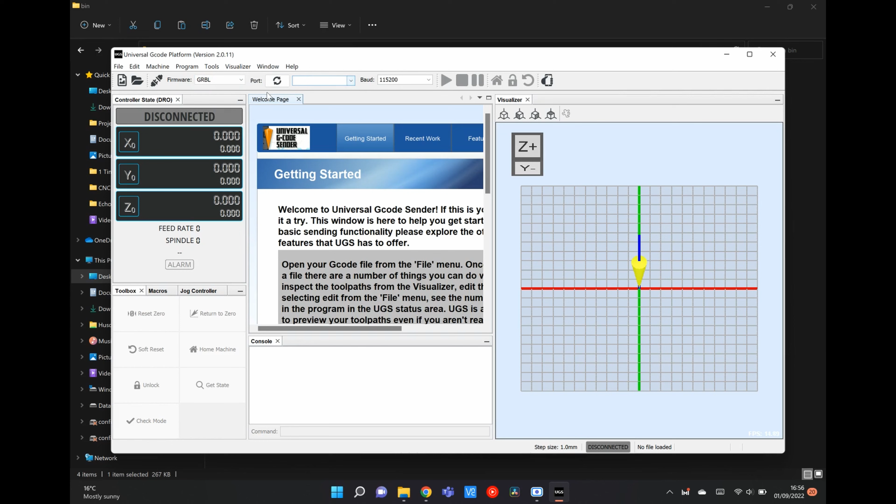So I've installed that in my same CNC folder, and I've got the Universal G-Code Sender software loading there now. So here's the software, so it looks like where you can obviously connect to your machine. A bit of a get-started guide there, and where you can obviously load the different files. So you've got the open section to find the file that you want that's got your G-code on.

I'm going to try and connect to my device now. Okay, so what I'm trying to do at the moment, I've still got it plugged into the USB port of my laptop now, but it's not connecting. So I've got the driver installed, it's not connecting.

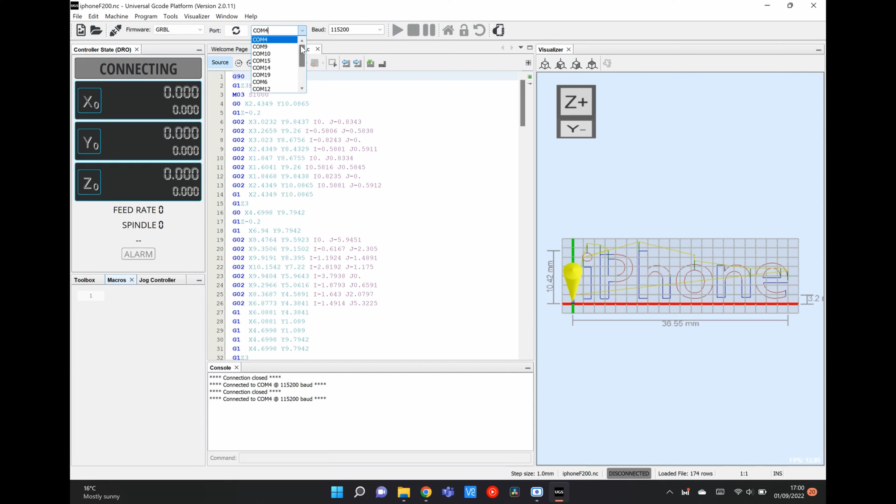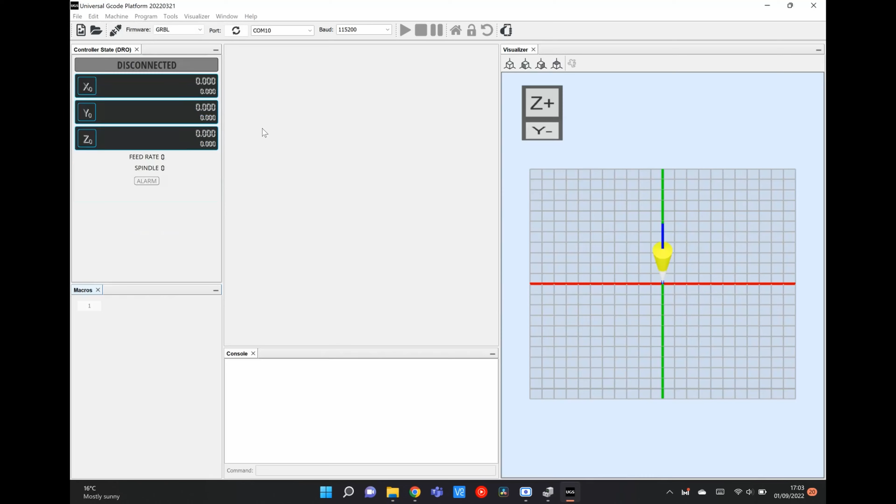I've checked the COM ports on the machine, and I can see it's definitely selected the right one. Let me check Device Manager again. It's the right port, but I should try updating the drivers. Apologies, this is time-lapsed to show you what I went through when it didn't work. It's currently plugged in directly into my laptop's USB port, but for some reason the UGS software wouldn't detect the CNC, the Pro 3018. I'm updating the drivers, making sure I've got the right software, selecting the right COM port and clicking connect, but it still won't connect. I changed the baud rate thinking that might be the issue, but I'm pretty sure that's all set correctly. I'm just trying different options with the drivers.

This gives you an idea of what the software looks like. You've got the getting started welcome page in the middle, and the section at the top where you can open your files from.

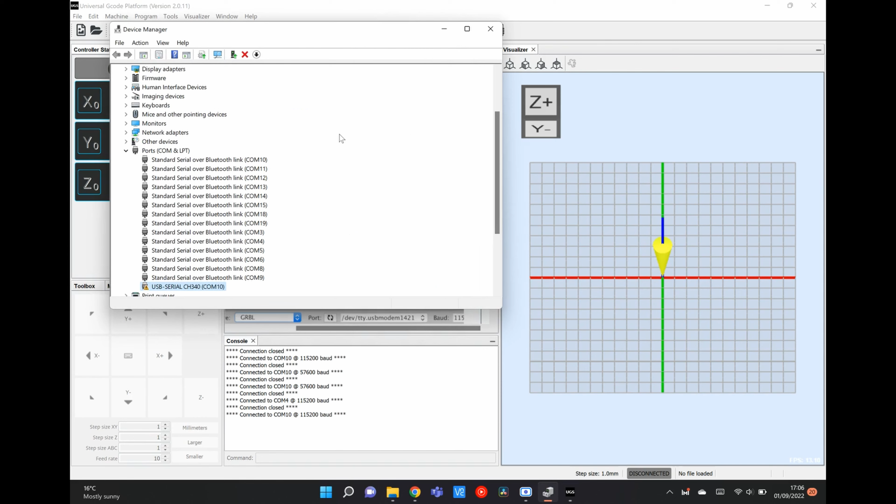Okay, so I was having a few issues connecting the device to my laptop. I'm not really sure what's going on. I'm going to try something else now - not sure if it's something to do with those COM ports not connecting properly. Let me show you what I've done.

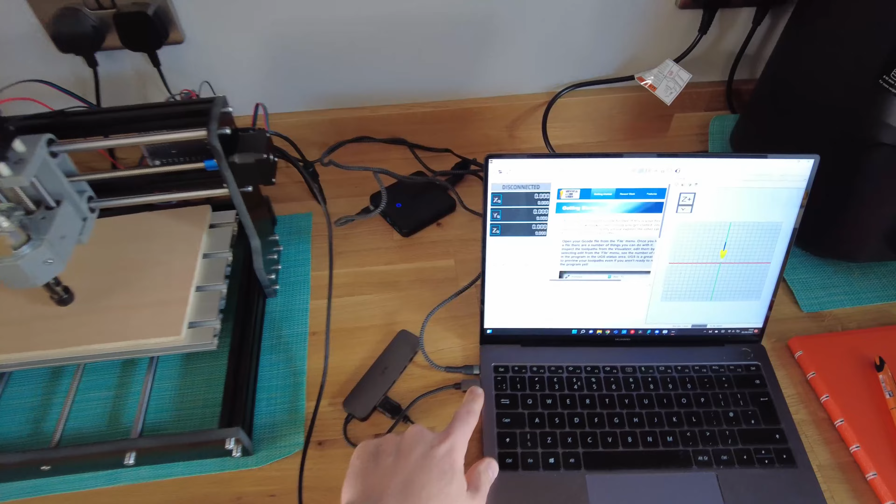So I've got this USB hub, which is what I generally use. I don't tend to use USB-A, or whatever it's called now - I've got a USB-C in, and one of these standard USB hubs. I've connected the cable there into the CNC machine.

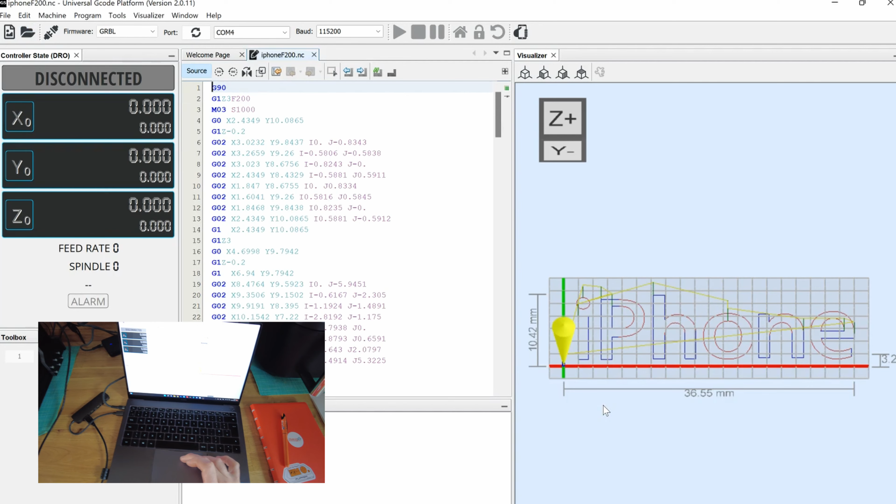I've got UGS open here, ready to connect. What I'll do is load in that sample file that came with the USB device, which is the iPhone words. It's not powered on, so I'm going to power it on now - just give it a few seconds.

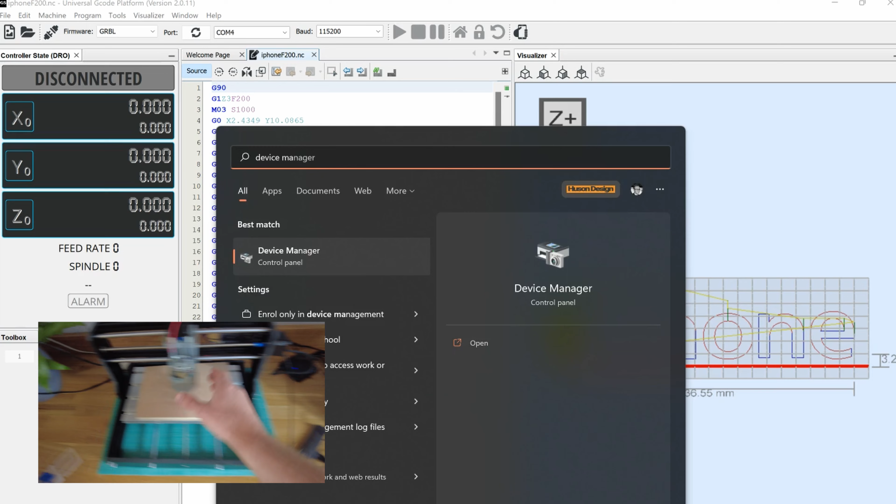I'm going to check Device Manager again. Let's have a look at my USB - it's not coming up with anything this time. Let me just unplug it and replug that back in.

I'm on the wrong one - let me check the ports. COM ports, going to refresh that. There we go, I've got it now - the USB serial port, and it doesn't have the error next to it this time. It's on COM port 22, which is a totally different COM port to what we had before.

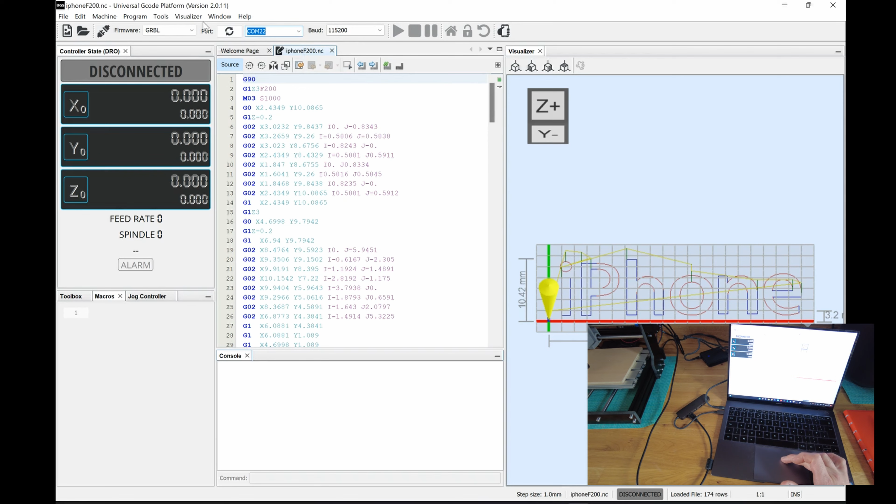Let me go in here and do a refresh in UGS. COM port 22 is there - I'll leave it at the same baud rate, and now try to connect. Let's see if it works this time. So I've connected, connecting, idle. Okay, we're connected.

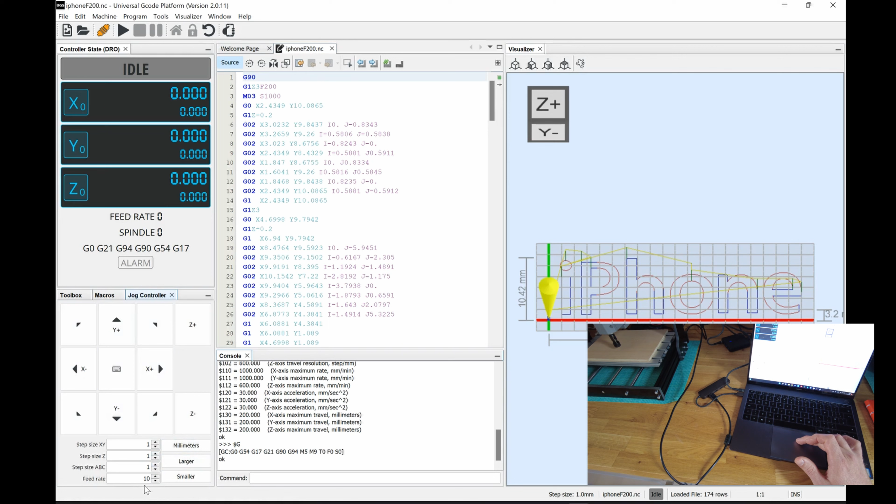Within the software now, I'm going to click on the jog controller tab. I can see that I've got control. I'm just going to knock this feed rate up, which is the speed it moves along each axis, and then test each of the axes to see if they're working.

I'll do the Z axis first, which should be the spindle motor going up and down - excellent, that's working, up and down. Now the X-axis, the spindle going left to right - that's also working, excellent, and left. Then the Y-axis, which is the bottom plate - that's also moving in both directions.

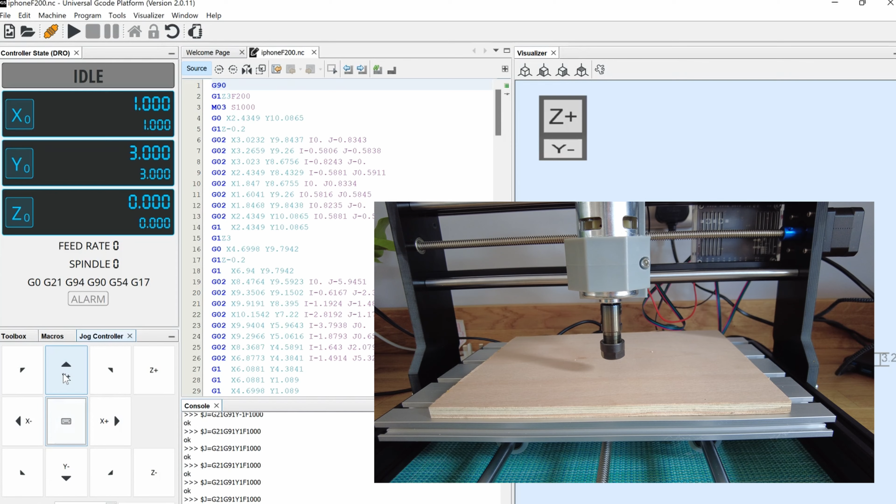Excellent, so we've got full control over the device now. It's connected to the laptop successfully, now that we've messed about with those COM ports. I'll get the camera set up to show you the machine a little better, get it pinned down, locked down, and we'll do that first test engraving.

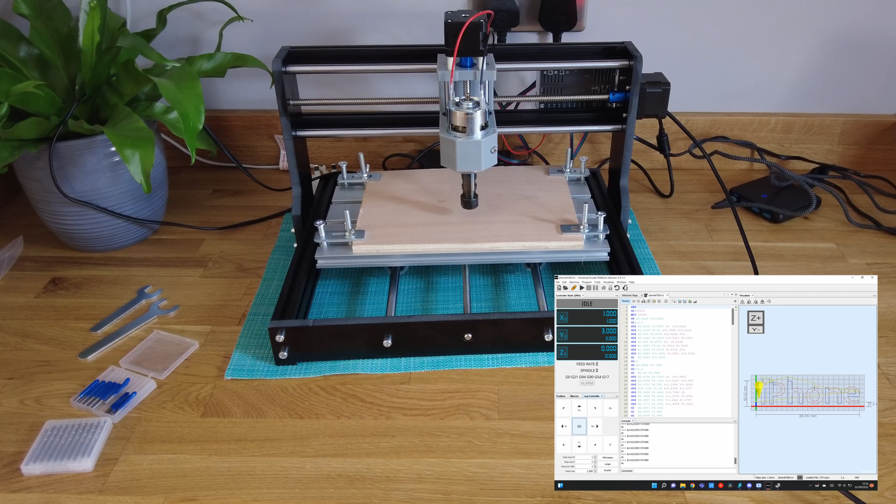Okay, so that's the base plate, the plywood, fastened down. Took longer than I think it should have done, but I think I'll get better at that. Next thing, I'm going to put the drill bit - the router bit, sorry - into the machine.

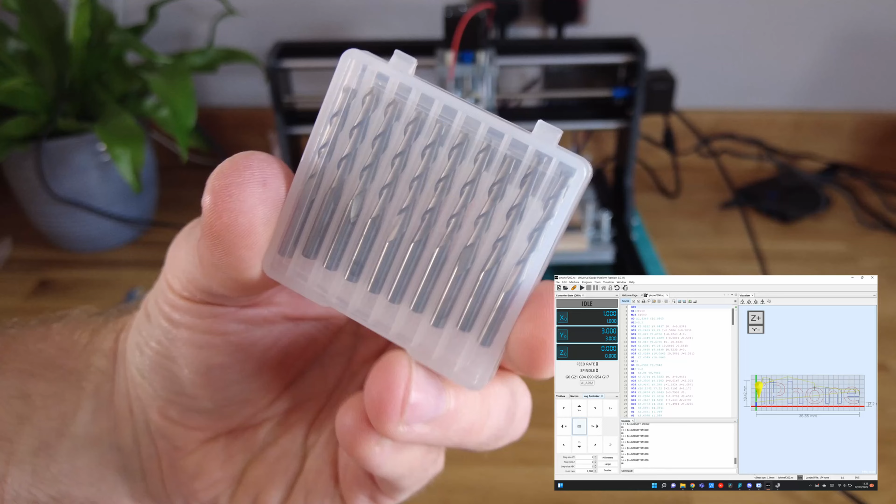It came with two sets: really small ones with blue protective tips on them, and another set that looks slightly larger, probably to get rid of more material. With this one, I'll go with one of the small ones and just see how we get on.

I'm going to raise that spindle up now using the software. Okay, that's raised up now. I'm going to use the two spanners that came with it, which is really cool, and loosen this bottom off by hand.

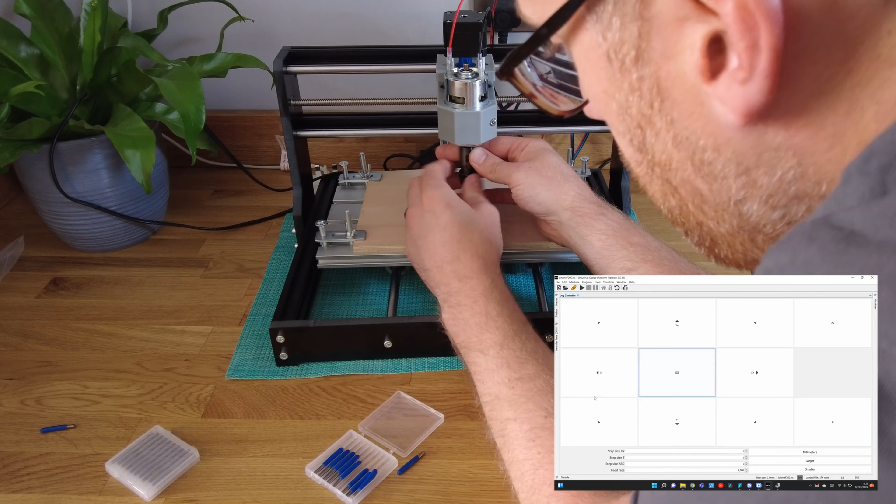I'm going to pop that in there, hopefully, just loosen that off further. Okay, that's in. That's really sharp, just spiked my finger - in fact I'm going to pop that over the edge of it because I'm catching my finger slightly.

Okay, so I'll tighten that by hand to start with, like so - it's in there, I've got the blue tip off now. I'm assuming the wider one fits on the bottom, and the smaller one will go in there. I'm going to tighten this up, but not too tight, because with things like routers, if you do it too tight it can be an absolute pain to get out. So let me tighten this up.

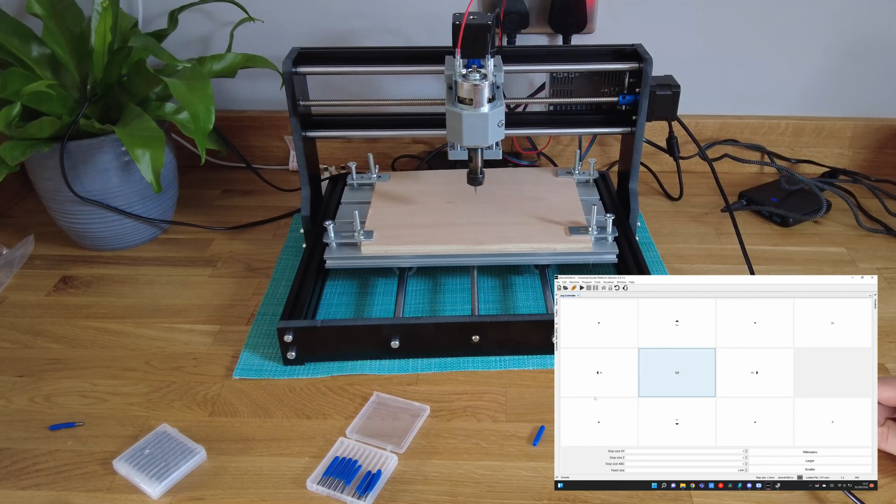Okay, so it's not like ultra tight, but I've done it 80% with my hands, let's say. Okay, so now we've got the router bit in. This is locked down.

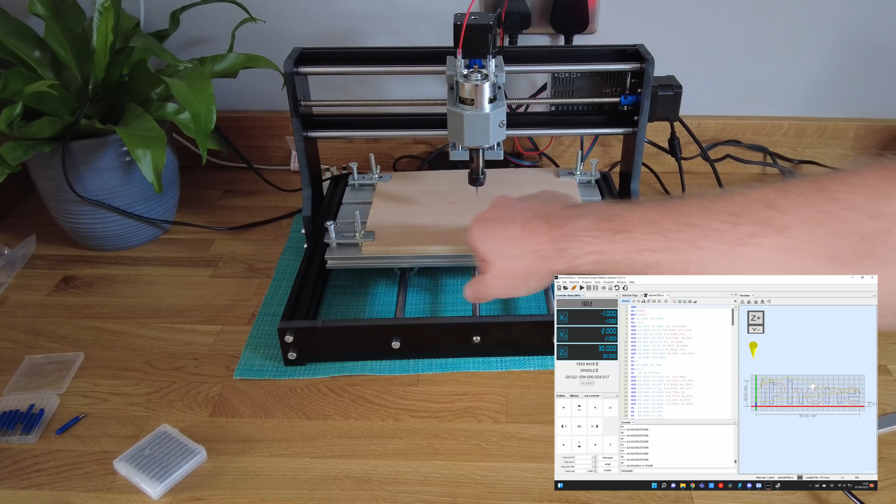Let's get things lined up now to this iPhone engraving. I'm going to try and do the print. You can see where the piece needs to be, and you can see the yellow lines on there where the drill bit's going to run. So I need to get it somewhere down this bottom left-hand corner, so then it'll engrave kind of here, so we don't catch any of the edge plates. I'm going to start it around here physically, so I'm going to move this now with the software manually to somewhere over there.

Let's go about there, I think. We'll just bring it towards us slightly. So that's there, and I'm going to put now the Z-axis down, so it's just touching that wood. I'll take it down one more. That's in the wood. That's now on the surface of the wood.

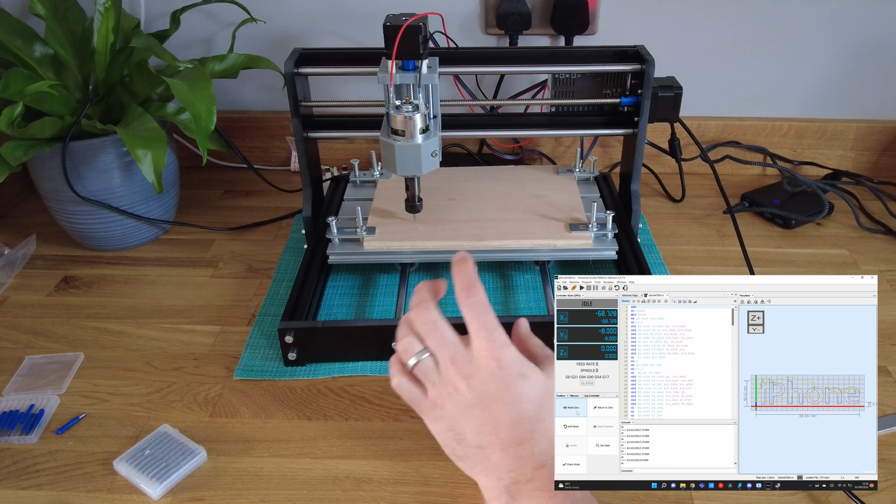So I'm going to do that, and then in the software again, I'm going to click now the reset 0, setting it to the 0 point, which should hopefully match it up on this start point here. Let's have a look at this visualizer. Yes, so it thinks at the moment this yellow icon is where I am, but I need to zero it up with that now. So if I press on reset 0, I'm hoping... yes, so we can see now at that point, that's the start point.

Okay, so we've got everything set up. We've got the drill bit just touching just above that surface. This is all secured down, software's connected. For the very first time, I'm going to press play in the software, or start. I'll send the code to it. Fingers crossed, we don't have any problems, but this literally is the very first time I've ever used one of these devices, and this machine. So let's press that send button.

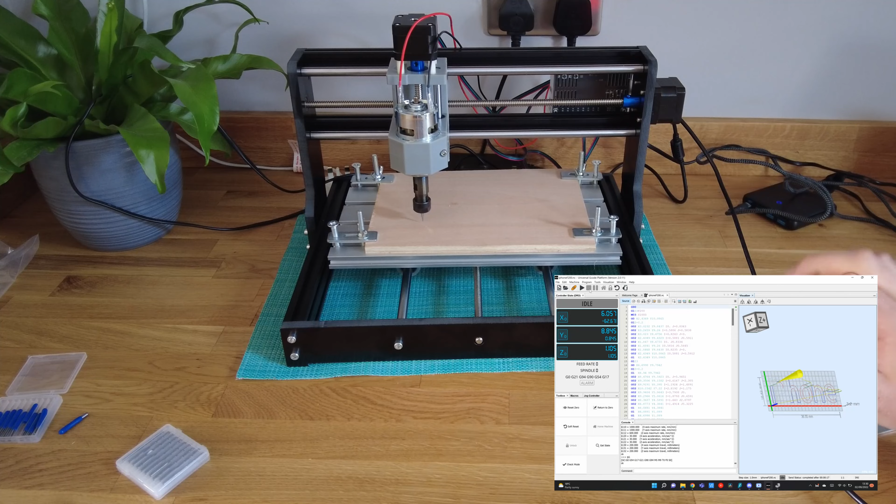Okay, so I've stopped that there a few seconds in. What I've noticed straight away is I obviously didn't have the drill bit low enough, so I'm a little bit too cautious with that. So let's use the jog controller and move it back.

That's into the surface now, so that's touching. I'm a little bit cautious, I don't want to break anything. Let's give this a go now. So I'm connected again, this is attempt number 2, so let's resend that code now.

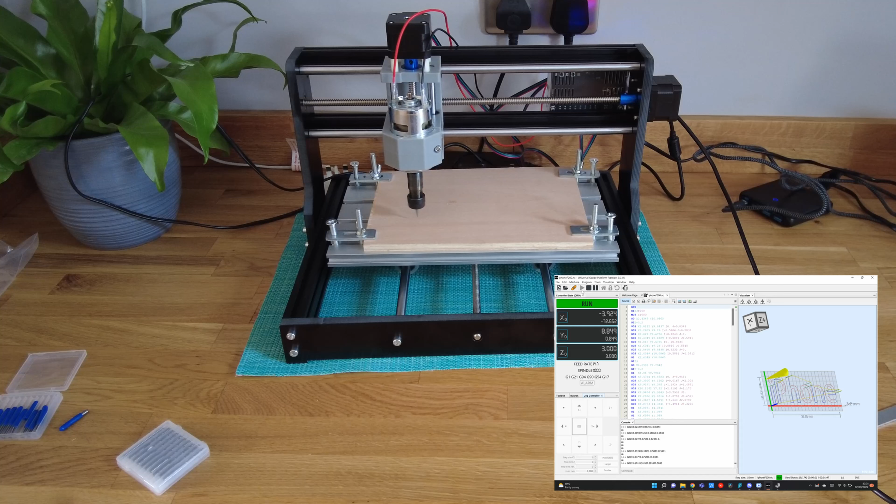Okay, we'll stop again there. So again, I think I'm being too cautious. I'm going to put it slightly into the surface. Okay, we'll give this a go now, hopefully we don't break it.

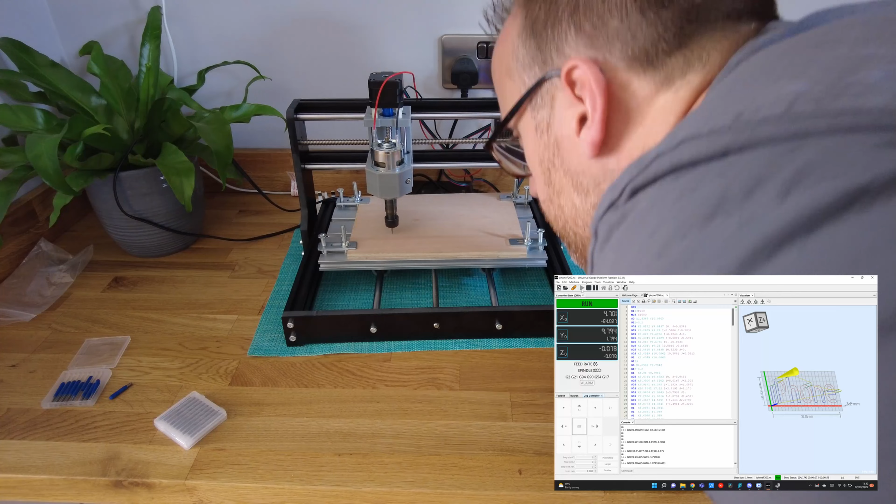Okay, same issue, so let's bring it back to a closer point. I'm going to go a little bit lower, even lower on that Z-axis now. My only concern is it is in the wood, so I'm wondering if I've not put the drill bit in properly, or the spindle's slightly too high in the casing. I'm not sure. Let's give that a go, let's try that again.

Okay, same issue, so I'm going to go even further down with that Z-axis now. Oh, so you see that went in too far. So I think that's the lowest I can go, I can hear the feedback from it, it's going too far in. So let's try with that now, we'll see what happens.

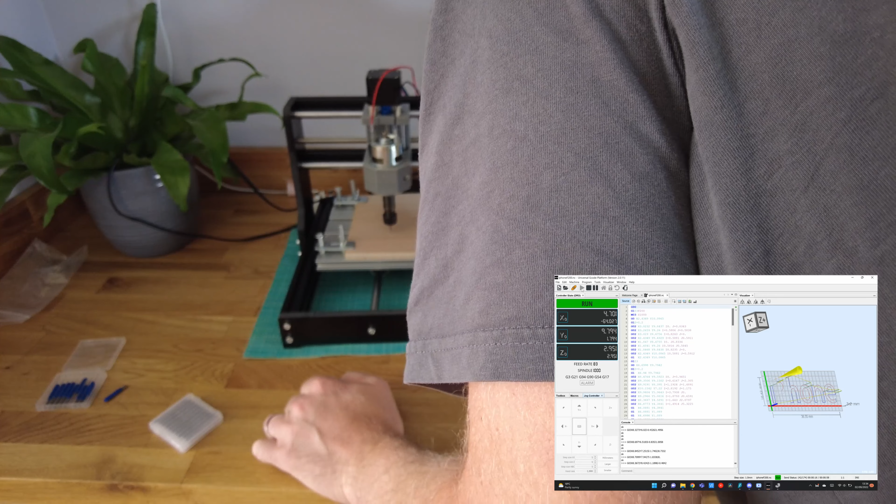Okay, I'm going to stop that there. So I'm obviously missing a part there, so I'm going to pause, have a look in the software. I'm not following a guide here, which I probably should have done. So let's see what's going on.

Okay, so what I've just looked at, I've had a thought, because when I put the drill bit down to the surface, I don't think I pressed reset 0. So if I bring the bit up, take it back down... one less... one more actually, so that is on the surface now. So now go over to Toolbox, reset 0. I'm thinking I had the 0 point set above. So fingers crossed, give this another go now and hopefully this might work this time.

Okay, done. Let's have a look. I'll use this useful little brush that came with it. First, though, I'm just going to move that drill bit out of the way using the jog controller, just to take it out of the way.

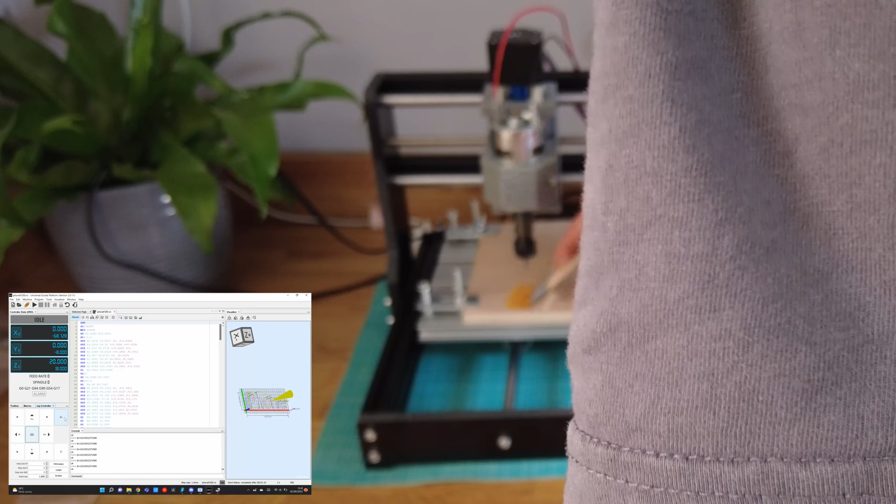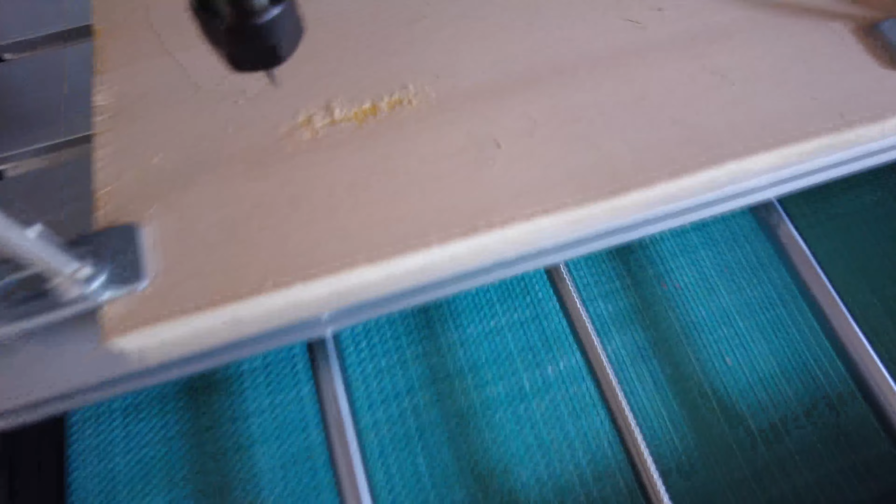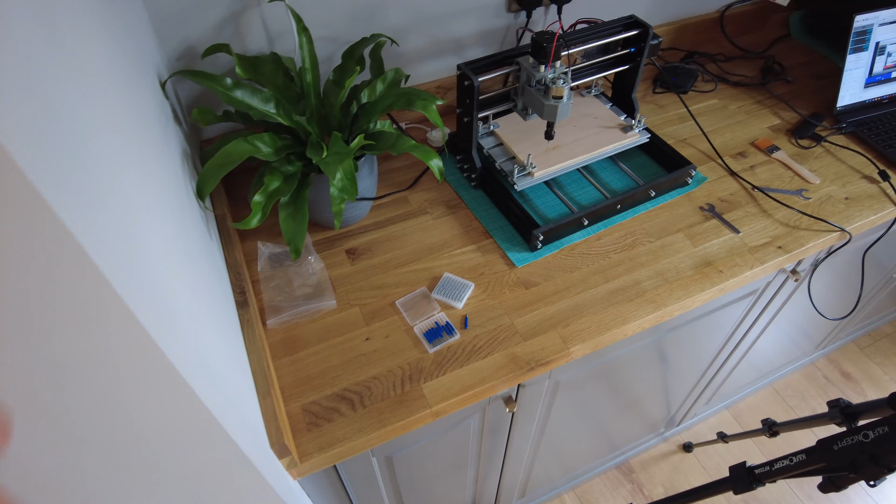Okay, let me pause it there, and we'll go in for a bit of a closer look. So it was an iPhone, the word iPhone, to be engraved. You can see it's done the outline of the word iPhone. I think because it's not a very deep cut, it's just the outline, and I'm using plywood, it's obviously delaminated or broke away that first surface. So the plywood might not be the best for this - I haven't done the full research into it, I'm just doing it by trial and error to work it out myself.

But perhaps plywood, if you're just doing a light outline cut, isn't the best. Okay, so this is the end of this video. We did the software setup on the PC with UGS, installed the driver to get connected to the machine, and did troubleshooting - I think it was down to the COM port. I'm not 100% sure, but it's definitely working properly now with the USB hub I'm using, so I'm putting that down to a COM port issue. I don't know if that's common, but that seemed to have got around it for this one.

We then went through an actual test of the machine - a test engraving. We used the lock nuts to lock the piece of material down onto the base plate, and then tried doing that first test. I've learned a lot from that in terms of making sure to reset to zero for the drill bit, even when you've lowered it down to that surface. That was the issue I was having - I didn't do the reset to zero when I got the drill bit down to the correct place. So I guess over time, as I do this more, that reset to zero will become drilled in and I'll make sure to do it every time. But in terms of the test, it definitely worked.